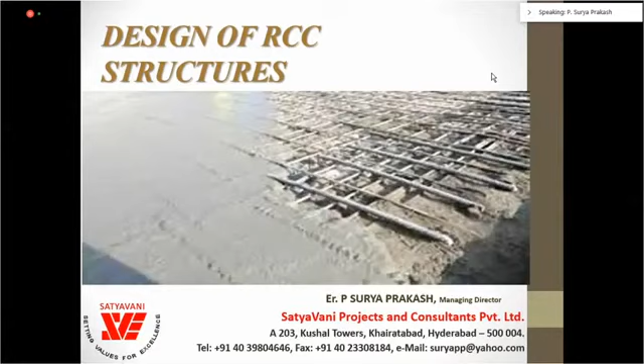So, design of RCC structures with practical aspects covered - this is the topic of today. My overview of the presentation is introduction to the topic and types of structural systems, and types of structural members. We will cover reinforcement concrete and analysis of RCC structures, and then design of RCC structures. So this is the flow of my presentation today.

Reinforced concrete is a combination of concrete and steel, and it is a marriage between tension and compression, that's what I can say. Concrete is flexible when it is made, and it gets strong in compression in 28 days. Steel is strong in tension but weak in compression due to buckling characteristics.

Concrete is the second most used material, and reinforced cement concrete is the most suited material for construction of buildings. Francois Coignet was the one who first adopted this concept of reinforced concrete. In 1853, the first reinforced concrete structure was built, a 4-storied house in Paris. Ernest L. Ransome was an innovator of reinforced concrete techniques at the end of the 19th century. So this is a brief history of concrete.

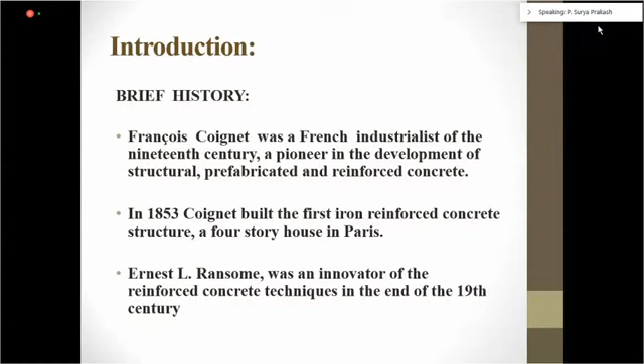Reinforced cement concrete is deployed in columns, beams, footings, and slabs, as we all know, mostly used. There are several other applications like storage structures, dams, water tanks, tunnels, bridges, walls, and towers.

In India itself, we have a 353-meter tall concrete tower, used for TV tower, and it withstood the earthquake in Gujarat post-earthquake. We also have shell roofs, folded plates, tall structures like chimneys and skyscrapers, Burj Khalifa, which is a standing example of fully reinforced concrete used in an 828-meter tall building.

We can make any shape with concrete because of this formation and the robustness in the structure due to rigid joints, and there is a lot of redundancy available in concrete structures, and flexibility in planning. We can look at columns, beams, slabs, any shape of slab we can do, with rigid joints and ease in design, as we'll see as we move forward.

The only difficulty is that detailing has to be very carefully done. It's an art actually, detailing, because we have to avoid reinforcement congestion. We have so many diameters of bars, and we have to tackle shrinkage in the design and the creep. Particularly creep will be a factor when we design high-rise buildings, so we have to do creep correction in construction, and then there's corrosion of reinforcement. Though reinforcement is embedded in concrete, we can't avoid corrosion if we don't deal with good concrete.

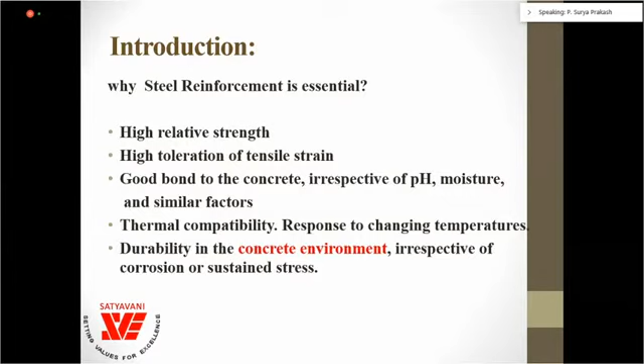So the merits of reinforced concrete include the bond between steel and concrete giving a stable structure, and less buckling risk in concrete structures because of the size of the concrete and the steel embedded in it, arresting the buckling characteristics of steel.

And we have aesthetics, like concrete structures can be aesthetically designed, and lesser corrosion.

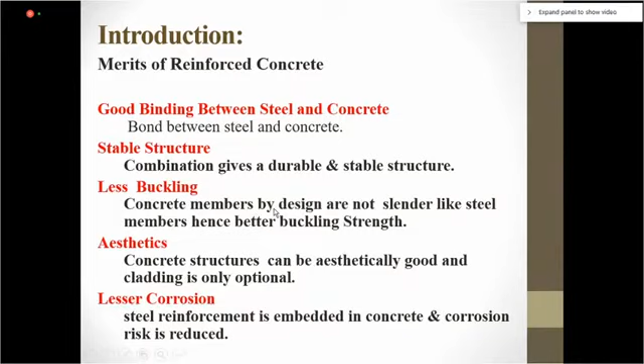Now we have to deal with vertical loads. Any structure, when designing, the first and foremost is dead weight, the self weight of the structure, and then superimposed dead loads like brick walls, floor finishes, partition walls, and so on. Then live loads, which are variable during the life of the structure. Vertical loads cause sagging resisted by beams and slabs, while lateral loads, primarily wind and earthquake, cause sway in the structure, resisted by the stiffness of the frame. This is the basic behavior of structures, which have elements like slabs, beams, columns, shear walls, and finally the foundation to transfer load to the ground.

We have performance-based design controlling deflections within acceptable limits for the service criteria of the structure, and we have partial safety factors in design to account for uncertainties in loading and material properties. Many people tell me, sir, concrete is assumed homogeneous, but it's not really homogeneous. To factor for that, we have partial safety factors defined in IS 456 for considering loads and applying the factor.

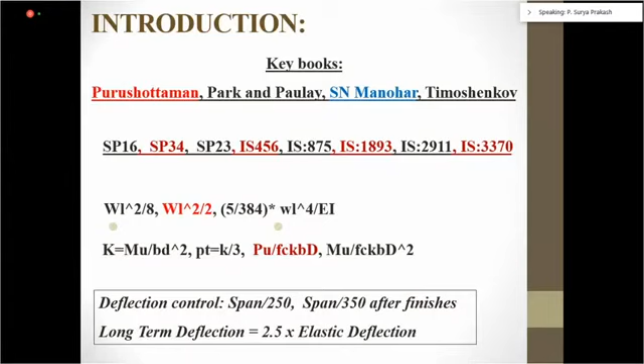The rest we can even go faster, no problem. So now the structural systems—the basic structural system we all deal with is a masonry wall and a slab. That is the simplest one, a ground floor building you can construct. But still you have to design the masonry bearing wall as per IS 2212 and IS 1905.

Masonry wall also—please never construct a brick wall without design. Let us not leave it to masons. That is very important. Recently I had an issue near Hyderabad where a brick wall collapsed from the 3rd floor due to wind of 40 kilometers per hour. So we have to be very careful in design, even for brick masonries. I can have a separate session for that.

Today I'll concentrate on the slabs. When we design slabs resting on walls, that's not a clamped edge actually—that is a simply supported edge and continuous edge at the most. So we have to design these slabs using the coefficients given in IS 456. We can design these slabs.

So this is a simple plan. When we get a drawing from a planner, we have to consider it and decide the position of the columns and beams so that it looks aesthetically good, because we cannot have protruding beams sticking out of the wall — that's not good to look at. Similarly, in corridors you don't want so many beams running. So we have to think of aesthetics when we design, and make the framing considering the plan given by the client.

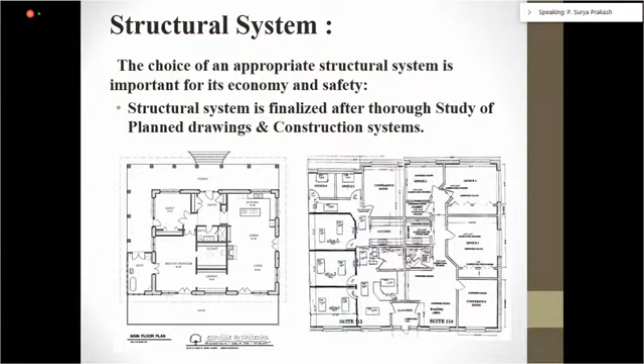The framing system selected should be suited to the building plan. The selection of the structural system is to be finalized with respect to cost, time, buildability, and functionality of the structure.

I have seen many structural engineers design the structure before even considering the construction methodology. That can lead to a lot of changes during construction, so we have to consider time as well.

Recently I got a call from a client. He asked, 'Sir, this is my plan — what will be the cost of construction and what will be the time taken?' I said, I can give you any time — you tell me in which time you want it and what budget you have. So this is what a structural engineer has to think about.

Considering the client's requirements, we have to decide the time available, and based on that and the buildability — meaning resources available, access to the site — there are so many factors we must consider while deciding the structural system: whether it's precast, tunnel form, slab and beam system, or monolithic rigid construction. There are many such systems even for residential buildings.

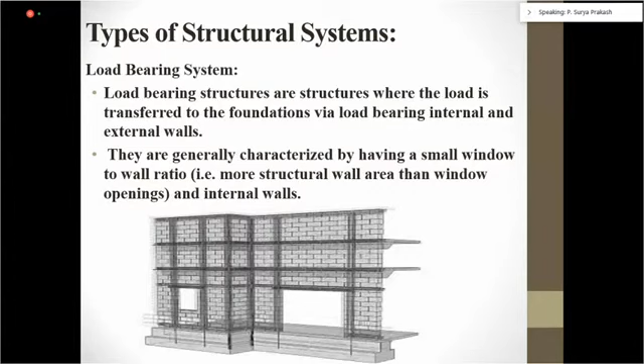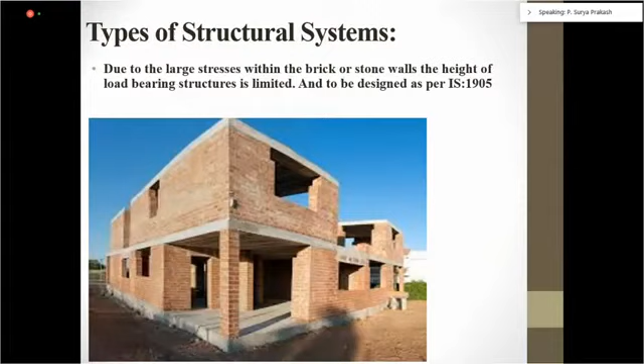In fact, post Gujarat earthquake, most government buildings performed very well because they were constructed using proper brick masonry and framing — all engineered, I would say — and 90% of the structures performed very well. So brick masonry is also good against earthquakes. In fact, post Latur earthquake, we constructed many houses with mullion and band construction, confining the brick wall, and it performed very well.

Next is the flat plate floor system. This is mostly adopted in the UK because the earthquake effect there is very low and wind forces are also very low, so they adopt this system for residential buildings.

There is no edge beam in this system. Labor costs are very high in the UK, so they don't even provide the edge beam — instead they increase the slab thickness.

I have designed a slab thickness of 9 inches for a residential building, with a floor height of 9 feet. Because there are no beams, you can construct the walls flexibly. So this is another system, simple, where earthquake or wind does not govern the design — you can use this kind of system.

The advantages are simple construction and a flat, low ceiling — you don't need a false ceiling, and you can embed light fixtures and plumbing fixtures in the slab at convenient positions. You can go up to spans of 15 to 30 feet, that is 4.5 to 9 meters. For live loads above 100 psi, you can go for 4.5 to 7.5 meters for higher loads.

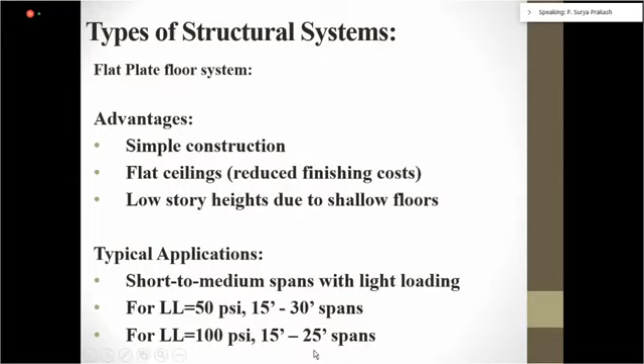Next is the flat plate with spandrel beam, that is, an edge beam. This reduces the thickness to some extent because you don't have to check for punching shear on three sides. When you have the beam, you don't have to worry much about punching shear, but you do have to check for one-way shear.

So you have increased gravity and lateral load resistance with the edge beams, increased torsional resistance, decreased slab edge displacement, and decreased slab thickness. These are the advantages. But the shuttering for edge beam will cause a little delay.

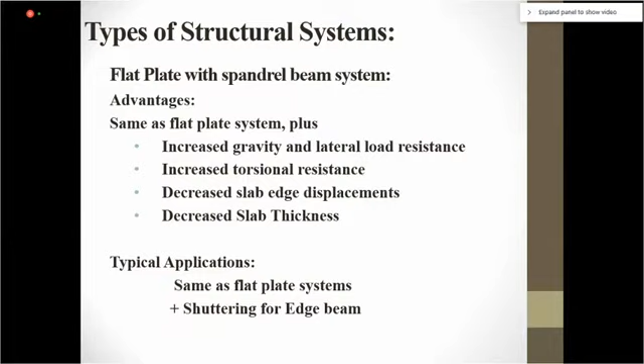Next is our conventional column, beam, and slab system, two-way bending. Here you can see the yield lines drawn for the same system, diagonal, square panel. So in this also we can optimize.

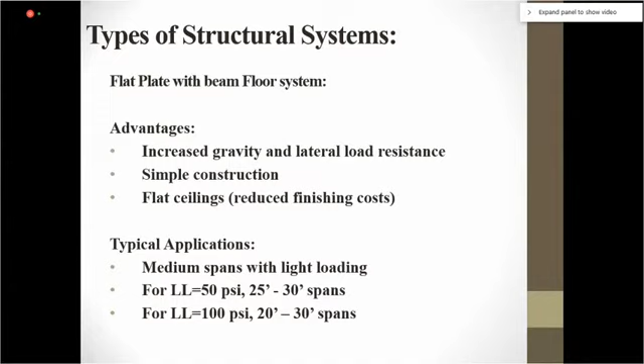I had BTech students do a project to identify the optimum span for a G+5 or G+3 structure. We found 3.6 meter is the optimum span - if you draw the curve, you get the optimum cost at 3.6 meter span. So it will be a very good system if you go with around 12 feet span, or 10 feet, 12 feet, 14 feet like that. That is a better structural system.

Next is the flat slab. We talked about the flat plate, and now we are talking about flat slab. In flat slab, you introduce drop panels. With these drop panels, the flat slab system can go up to 13, 14 meter span also. This is normally used for office or commercial buildings, because for office buildings it's advantageous to have larger span.

And for commercial buildings like mall and multiplex, 8 meters is an optimum span. So these are all the different optimum spans I'm giving, considering the overall planning, based on my experience.

Normally if any client comes to me to design an office, I'll go with 11 meter span flat slab. And in flat slab you can also have column heads to reduce the drop panel thickness. Otherwise, normally for 11 by 13 meter span, you will get a 475 drop in the flat slab, and the slab thickness will be about 200 to 225.

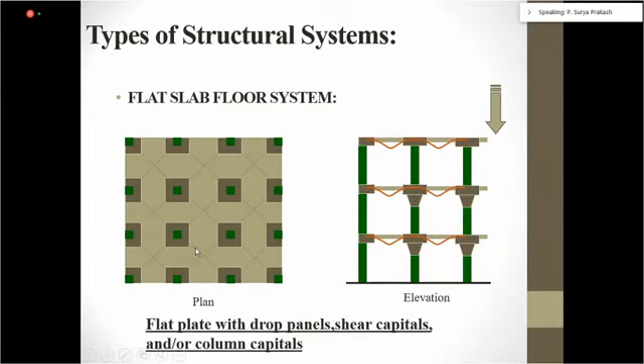You can also go for post tensioning, though I will not discuss post tensioning in this session. Flat slab gives reduced slab displacement because of the drop panel - one third of the span you can have a drop panel - and increased slab shear resistance, relatively flat ceilings, and lateral load resistance also improves a lot with this drop panel. And low story height, because the floor thickness is less and services don't require additional space, unlike with beam obstruction where pipes have to go below the beam.

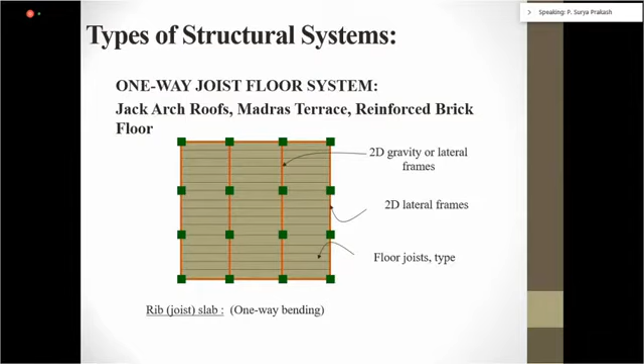Next is the one-way joist floor system. This is our traditional Indian system - Madras terrace or jack arch roofs. If you go and see old buildings, beyond 60 or 70 years old, you will see lime concrete with jack arch roof, or Madras terrace with wooden rafters and wooden joists. This is also one of the structural systems, but I will not discuss it today.

But nowadays we have this one-way joist composite system, where there is a technology called speed floor, promoted by Jindal, where you have light gauge steel cold-formed joists embedded into the concrete, behaving as compression concrete and tension joist. Very efficient, and it can also be used.

So we have these one-way joist floors. We can go for a longer span of 9 meters with a slab thickness of 120 to 150. That is the advantage in composite floors.

And we have the two-way joist floor system, that is a grid floor kind of thing, or waffle - we call it waffle when the spacing of the joist is very less - or ribbed floor. You must have seen in IS 456, ribbed floor is given.

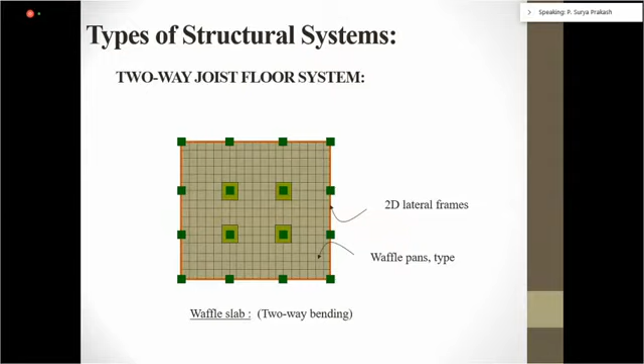Next is the two-way joist floor system - for longer spans with heavy loads. I designed this two-way grid floor in Hyderabad with a 25 meter by 25 meter span, with a 750 depth beam, in which we could even provide ducts for air conditioning within the 750 depth beam. So that is the advantage in this two-way system.

But you have to design for the torsion. When we consider the grid, two beams crossing at a rigid joint, you have to design for the torsion - combined torsion and bending.

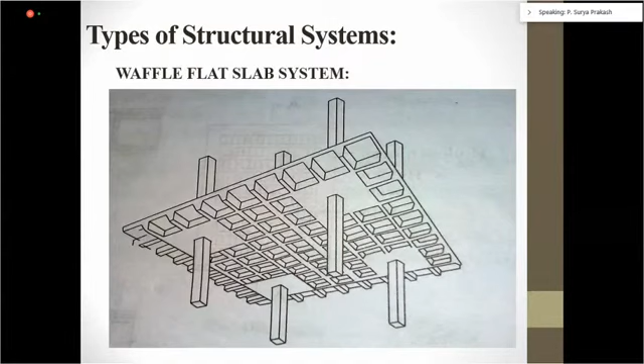So these are the waffle slab systems. Waffles, because they make a form - you can even use plastic troughs and pour the concrete into them; that is the waffle slab. And this is the ribbed floor I was talking about, and solid beams - this is one-way slab and two-way slab with solid beams, and waffle with beams, ribbed with integral beams, and waffle with integral beams.

So these are all the simple structural systems we come across in buildings, and they're all necessary - we have to use one of these systems depending on the span, loading, constructability, and availability of skill and formwork.

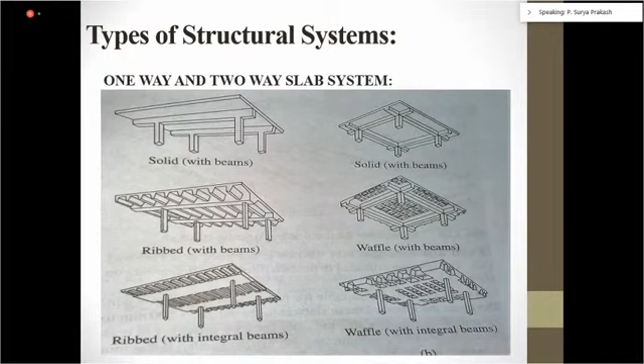So now we'll slowly go into the actual topic.

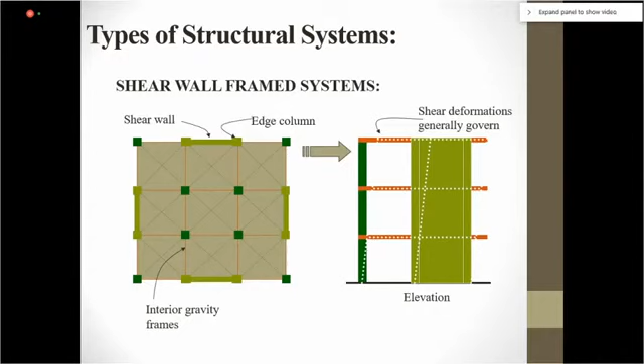This is also quite possible. The flat slab will act as a diaphragm, transferring the shear to the shear wall, and we can design this kind of structural system also. But shear wall requirement will be essential when we go for 10 floors and above. Beyond 30 floors, we have to design with a tube frame. I'll just show you this for creating interest in tall buildings.

So this is a core-supported outrigger system. This is Taipei Tower, you can see. And this is a frame tube system, which you can see in Chicago, Sears Towers, and brace tube systems. We have this in Chicago again, and this is a brace tube system.

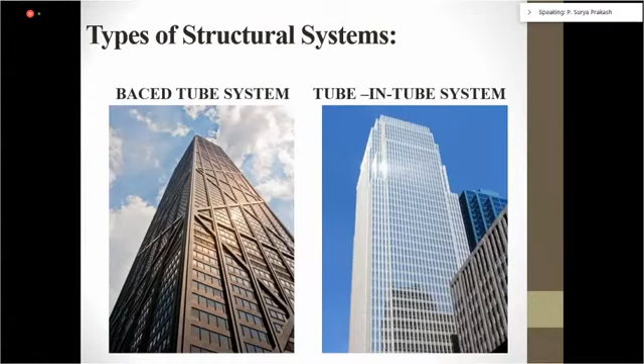So we resist the lateral loads with the outer frame and this bracing, and vertical loads are designed with the inner columns and beams. The same thing happens in cooling towers also. You have seen hyperbolic paraboloid shells - the whole shell is designed to resist the wind loads, and inside you have the frame, columns and beams in the cooling tower. They're designed for vertical load.

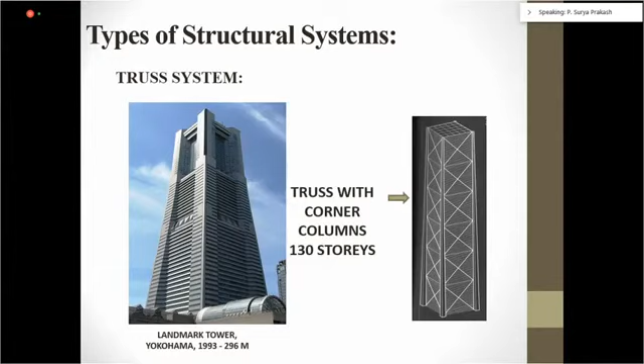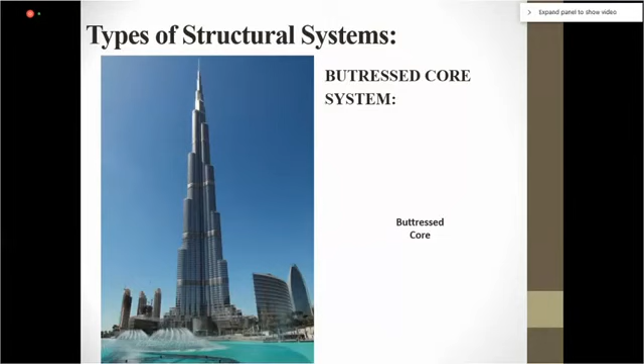And diagrid system, mostly talked about in Amaravati in Andhra Pradesh, but of course it didn't take off well. This is a buttressed core system designed by famous Bill Baker - it's 828 meters tall with a hexagonal core and I-sectional buttressing, because I-sections are very good in flexural resistance. And we have the space truss Bank of China, and we have the super frame. Of course, this is not there now - World Trade Center has been destroyed.

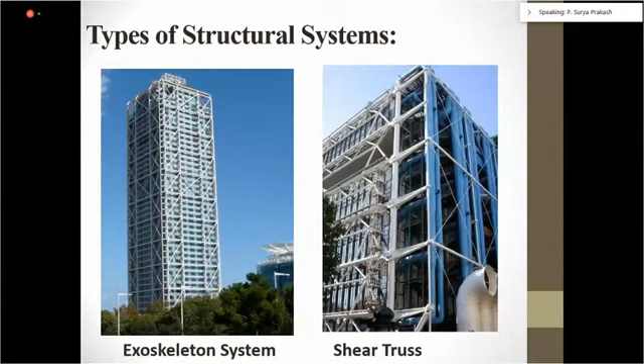And we have the exoskeleton system. These are all beautiful truss systems if we understand these trusses. So this is a truss in a high-rise building. Because truss is used for cantilever systems, you can design towers and these buildings also. So next, we have just seen the high-rise buildings because we have to understand the load transfer mechanism - lateral loads and vertical loads separately. Shown some interesting examples worldwide in skyscrapers and super tall buildings.

Now let us come to our own bread and butter, that is multi-storied buildings - stilt plus 5, cellar, stilt plus 7, that kind of structure, in which we have these routine elements of beams, columns, slabs, footings, and staircases. So today we'll focus on this - how the behavior of a beam works, what are all the things in a beam?

Basically, we design for shear and bending, and sometimes torsion. When we have torsion, we have to calculate the equivalent bending and equivalent shear and add it. Unfortunately, our IS 456 is still not rationalized for design against torsion, so it will be very conservative design if we design for torsion. That is why we have a clause in the code - you can ignore the compatible torsion. That means if the structure won't fail, like we have a cross beam and a main beam, and the cross beam has two supports, without considering the end moment is okay.

So you can end-release this cross beam in your STAAD analysis and take only shear, so that you don't have to design the main beam for torsion. Because if you design the main beam for torsion, it will be very uneconomical - your steel quantity will be very high. So design mainly for moment and shear.

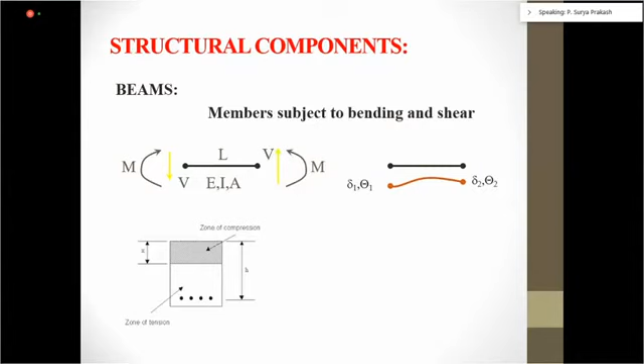And the deflection check, of course. We have these types of beams: cantilever, single support, simply supported beam, overhanging beam, continuous beams with roller and hinge, fixed beams with both ends fixed, and cantilever with the prop. So these are the types of beams we have.

Simply supported beam mostly comes on a brick wall, treated as a simply supported beam. Many people ask me how to model the bearing. In bridges, we use neoprene bearing to allow lateral movement of the beam. In brick walls, you can also put polythene sheets for allowing relative movement of the beam.

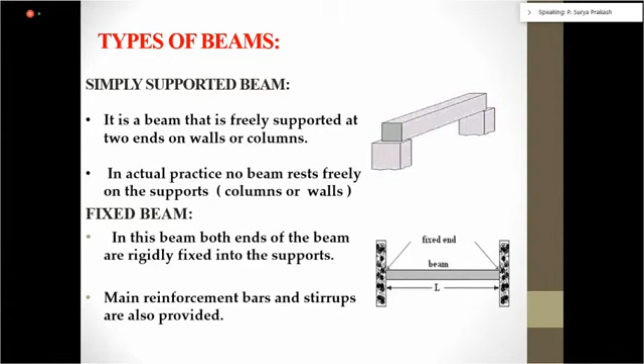And this is the fixed end beam. And we have a continuous beam like this. We can design the continuous beams.

As far as simple beams resting on the wall, IS 456 has given the moment coefficients for the beams - end support, penultimate support, end support, and intermediate support. Like that, we have the moment coefficients for live load and dead load.

You can also redistribute these moments in reinforced concrete. Up to 15% end moment you can release and add it to the span moment. It's economy, and also because we are allowing cracking, and realistically in the long term it can happen. So better to redistribute the support moments and design so that you economize.

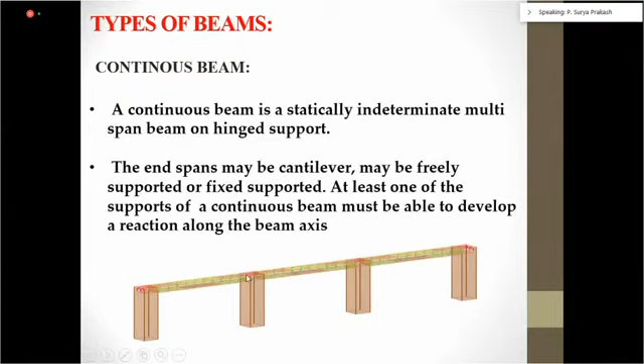Otherwise, you know what is the span moment here? It is WL square by 24. If you consider it as continuous, it is WL square by 10. You will have very heavy reinforcement here. Whenever you have heavy reinforcement due to congestion, performance will be difficult. So release some per 456 - that's my main idea of showing this code.

And now requirements governing the detailing and all we have to take care of. Next is the analysis of structures.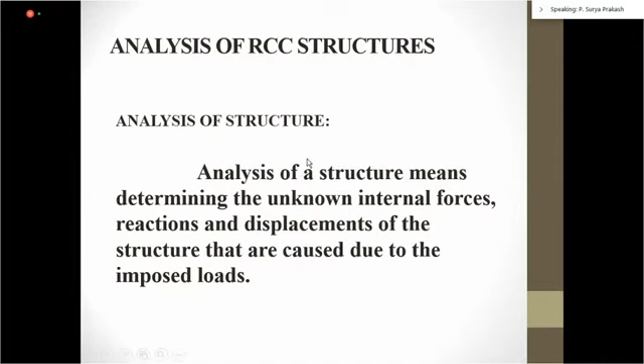Internal forces acting on typical structural members. Reinforcement will take care of the tension, and beam primarily is to transfer shear and bending. And the column, we have discussed, has axial forces - this is how axial force, 2 shear forces, and 2 bending moments. In a 3-dimensional component, this is how the forces will be.

So this is always - you should use the right hand. So you have the moment about both the axis and axial load, shear in this direction and shear in this direction.

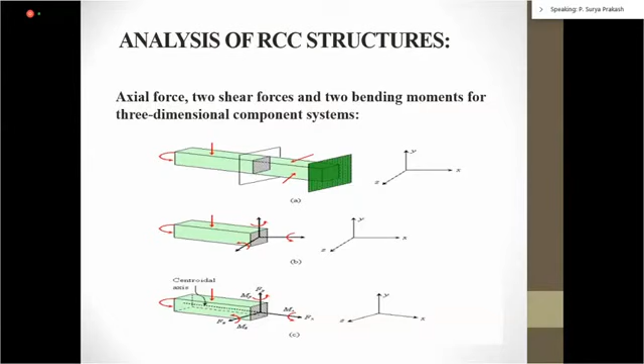So statically indeterminate structures - we have the force method, 3 moment equations, slope deflection method. Let's not forget these very important methods apart from STAAD and all. I'm doing one project with students now - they have done this much volume analyzing the whole structure using moment distribution, slope deflection, Kani's method, portal method, factor method, and cantilever method. All these methods are very important.

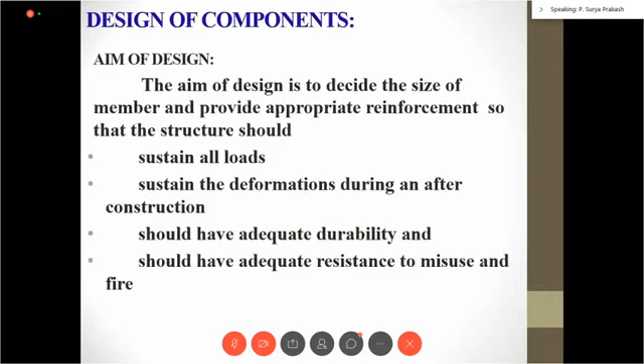Please use this at least once for one project and compare with STAAD results. Every engineer must do this analysis we talk about. And the aim of designing is to arrive at the steel required and the size of the member that is required.

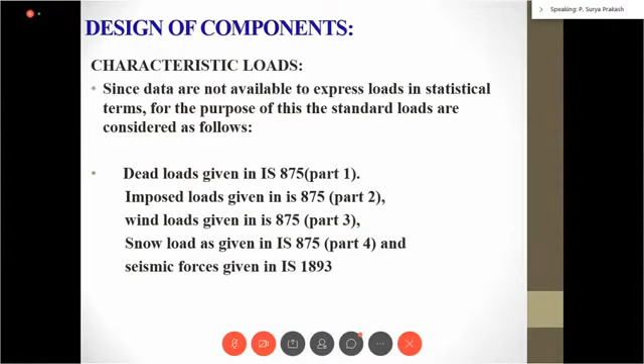For estimation of the loads, I explained IS 875 and IS 1893, very important. And then limit state method and working stress method, load factor method or ultimate load method. So these are all the methods of design.

Limit state of collapse, limit state of serviceability, limit state of durability - these are all the different limit states we have to consider in the design. I had recently one case argument in court - recently means about 10 years ago - about whether this structure is safe or not safe. How do you decide whether a particular structure is safe? So we have to understand this limit state of collapse, limit state of serviceability.

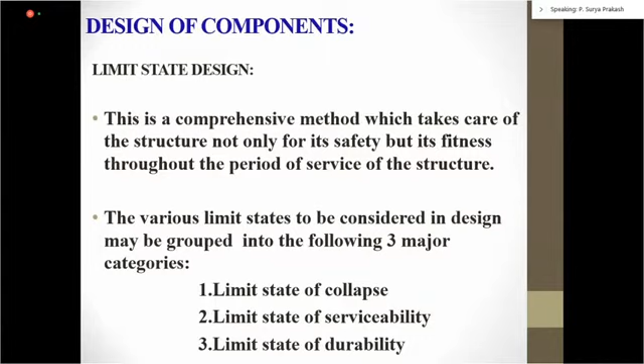Normally we design for limit state of serviceability, but we can also design for limit state of collapse - that is called robustness analysis. That means identify the most critical element in the structure, and if that element fails, still the structure has to be stable. That is the limit state of collapse.

So it deals with the strength and stability of the structure primarily, whereas serviceability deals with cracking also - that means performance of plumbing lines, performance of sewer lines, and water dampness resistance and all. That is the serviceability.

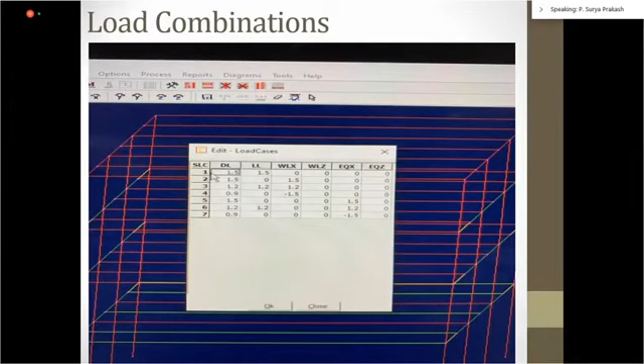So load combinations - we need to remember there will be 13 load combinations, dead load plus live load. Apart from that, 12 load combinations of earthquake in both directions, wind in both directions. This is minimum we have to do for analysis of the structure's load combination.

Next is the quantities of steel and concrete. Normally, what will be the steel consumption in a normal residential building? It can vary anything between 2.4 to 3.5 for residential buildings. So we have to remember that. What will be the steel in beams?

Steel in slabs is normally 0.65 kg per square feet of the building area. Steel in beams is about 0.8. Steel in columns is 1 kg, and steel in footings is 0.3. And other elements like staircase, lintels, and such.

We have to remember these quantities and design the structure such that they won't exceed beyond this. Deflection checks we have to do for lateral sway and vertical deflection of slabs and beams. 20 mm is the maximum deflection with the long-term effect considered, and with the factor of 2.5, approximately 8 mm is the elastic deflection you should control.

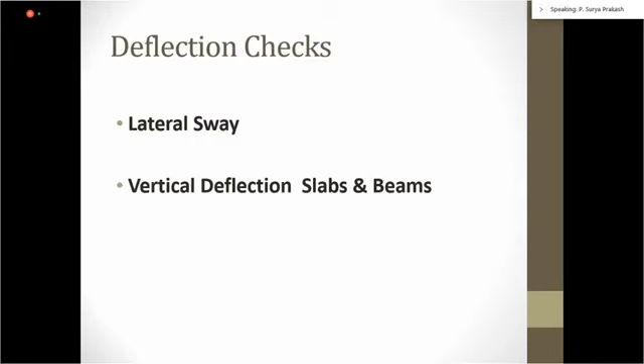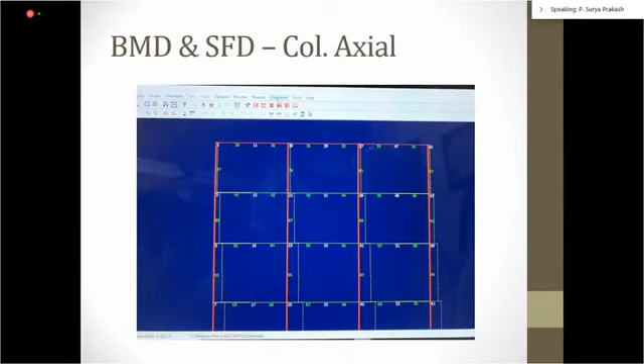Any analysis you do, if your deflection is more than 8 mm, revise your design, revise the size, or revise the frame. So you have to draw the force diagrams like this, axial force diagrams. You must see for every frame how it is behaving after the analysis, and the moments in the columns.

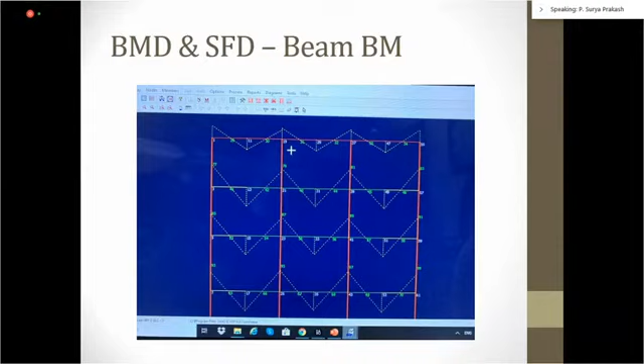I'm sorry, today only I quickly took some pictures of my software analysis and posted them. This is the shear force diagram in the beams, and this is the bending moment diagram. Of course it is curved, but this software shows only end moment and span moment, so it shows linear in between. We have to understand this bending moment and shear force, and study whether the structure is behaving as we have planned, as we have modeled.

That's very important before going for the design. So the design guidelines, we have deep beams and shallow beams.

And the calculation of moment and redistribution of support moment, this I explained. And we have this bending moment and shear force diagrams for the beams.

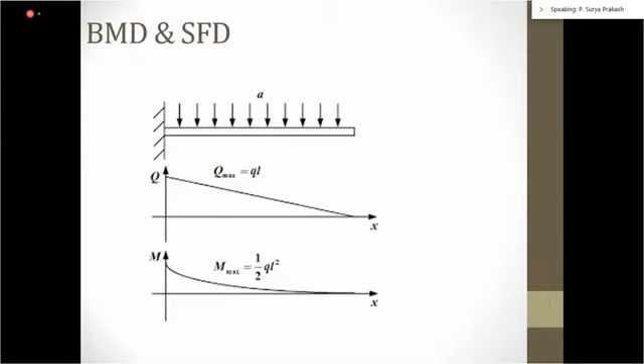Particularly you must verify this. I'm showing it because I interview so many students when they come for a job. The first question I ask them is to draw a bending moment diagram, and I am disappointed many people can't do it.

I'll only ask a few questions: What is characteristic compressive strength? And what is the bending moment shape for a particular shape of beam? That's why I'm showing this, it's very important for us to draw. We should be able to draw it - we may not get the actual value, but we should know the shape of the bending moment.

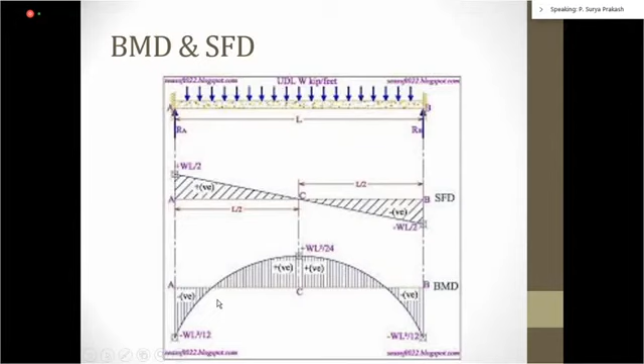This is very important for termination of the top reinforcement, and also for termination we have to provide minimum lap length beyond the point of contraflexure. So we cannot terminate the reinforcement at the zero moment. This mistake many people do in the footings also.

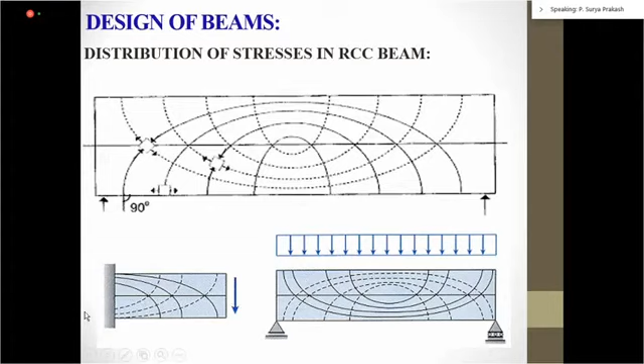So it's very important to understand the stress contour and the bending and shear stress pattern in the beams. And this is the stress diagram for limit state.

The main difference between limit state and working stress is: in working stress, we take the linear variation of the stress and model it with a triangular shape, whereas in limit state we take the parabolic variation of the stress, particularly in compression.

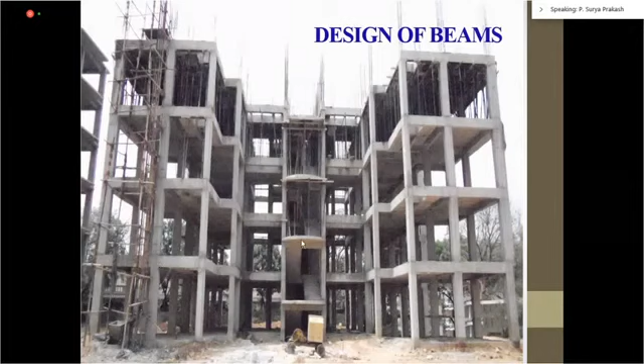So this is the multi-story typical building where we have the beams, so many shapes of beams, curved and rectangular beams. And this is from SP34.

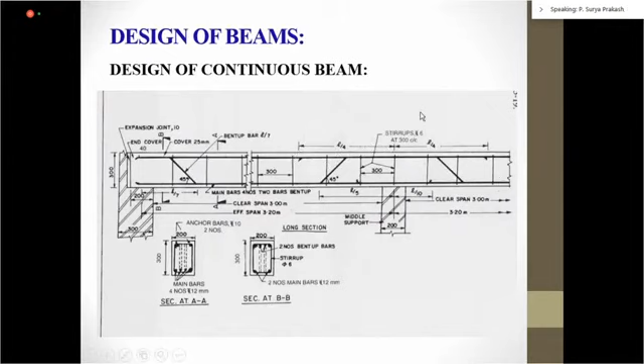And top reinforcement in case of end moments. So these are the typical types of continuous beams. Here you have the extra reinforcement, and the termination of the extra reinforcement normally as per code should go up to L/4. For cantilever beams, portico beams, tapered beams, we make it look thinner at the end. And flanged beams - this is a T-beam I was talking about, and an L-beam.

Now, the design guidelines for columns. In India, the optimum percentage of steel in columns is 2% because steel is costlier, but as per code it is 4% maximum. Now code allows even in India, but in Singapore they go up to 6% because of the value of space, so they can go up to 6%. But you need to use proper concreting methods, and even IS code now permits going up to 6% if you are not using the standard lap reinforcement.

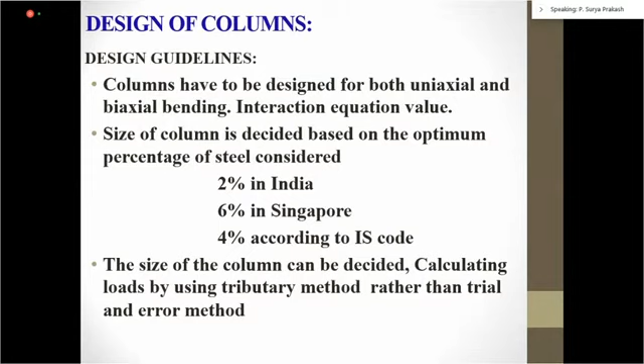So this is the reinforcement and design guidelines. As I said, the L and T shape we can provide. The main important thing I come across at many sites is that people don't provide the stirrups before concreting the below portion. This is very important - also cross connecting these columns before.

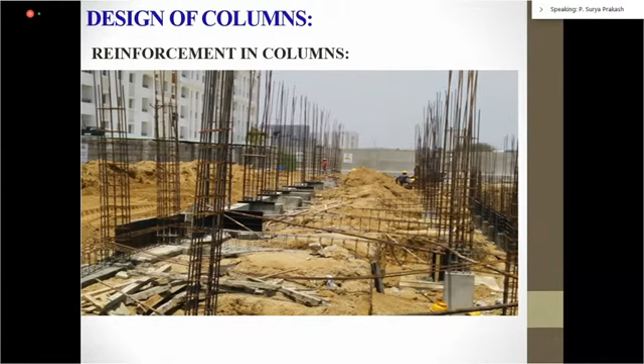Otherwise, people leave it like this - now that the corona lockdown has come, people leave the reinforcement exposed, and it will warp and lose its strength. So we have to tie it across always. You can see the bend here - you have to support these columns with cross supports or struts.

And the column construction and curing - this is very important. I always say, please tie the cube to the column only, so that the cube represents the curing of the column. And similarly, put the cubes on the slab.

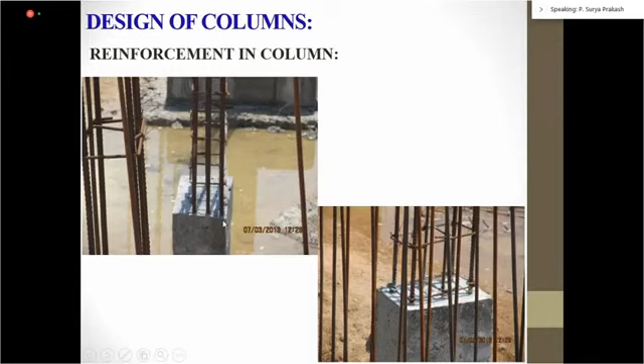So this is the reinforcement in columns - cover to reinforcement. You can see here it is more cover and here it is less cover, so that should be avoided. You must use cover blocks and marking properly. Here also, I always use bad photos to remind me that this can happen as a designer, and design properly. Here you can see couplers used without laps - we have done that. And reinforcement detailing for the columns also we have to consider.

Then for slabs, the deflection check L by delta should be less than or equal to 250 for dead loads and construction loads, and L by delta should be less than 350 for finishes, floor finishes, and partition.

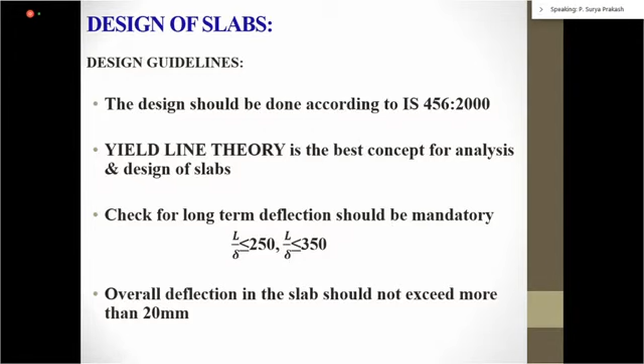So these are important guidelines, and this is the slab reinforcement before concreting, and this is the beam and slab - how you concrete and represent it is very important. The design of slabs should be done as per the coefficients given in IS 456. Otherwise, refer to Timoshenko for coefficients for different types of loading on slabs: concentrated load, line load, triangular load, uniformly distributed load - all types of loads, we have coefficients for different edge conditions.

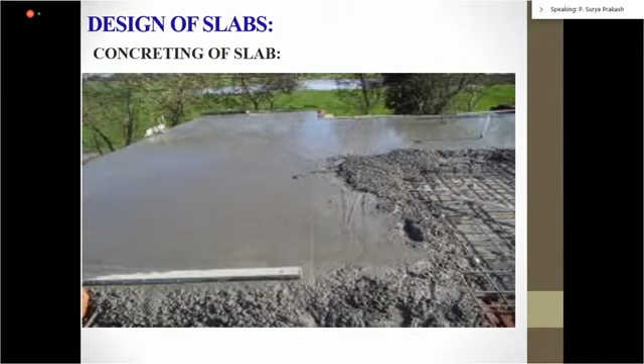So these are all the slab reinforcements and beams. Concreting sequence is also very important - we have to think of the concreting method also when designing, because we have to give the construction joint and the pour sequence of the slabs. We should ask for the method check.

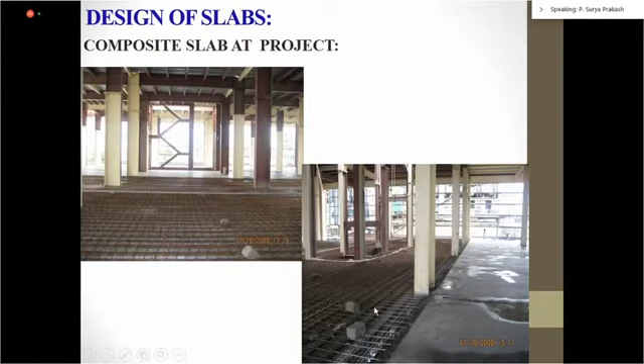Nowadays we have welded mesh reinforcement also for slabs and walls, so we can use that. And composite slabs with deck sheet also we are using, pouring concrete on it. This is mostly occurring nowadays for faster construction, reducing the cost of formwork, and arriving at quality and speed. So we should also design slabs as composite slabs, where we take the composite action of the beam and concrete - beam in tension and concrete in compression - and in the slab, deck sheet in tension and concrete in compression. That is our composite action.

So this is the one-way slab typical reinforcement. But I suggest whenever you put the slab on the terrace, provide temperature reinforcement on top. Otherwise insist on insulation of the concrete above, which is costlier than providing 0.12% steel in both directions in the top terrace slabs - very important.

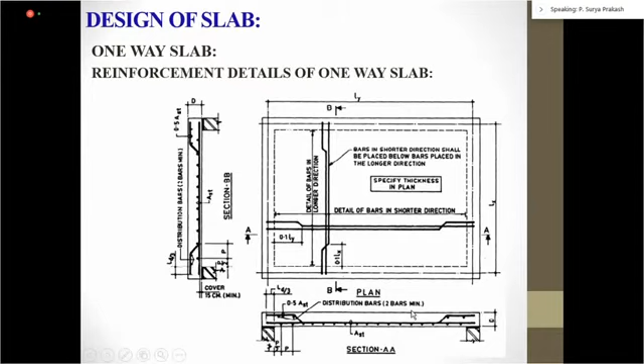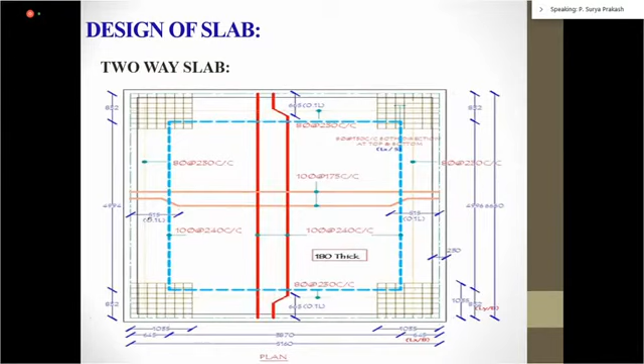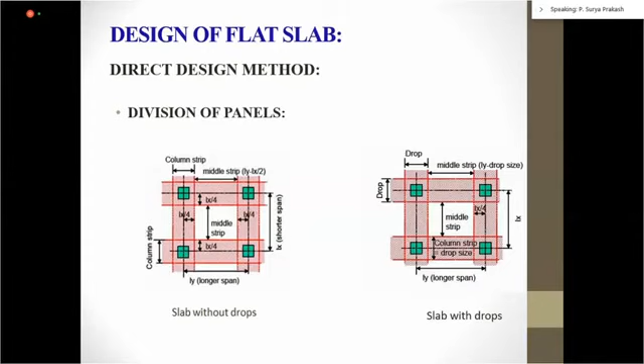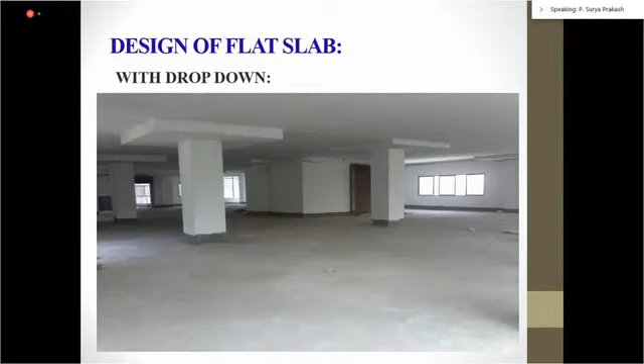So this is the column capital with the flat slab. This is one of the photographs we did about 25 years back. And this is a drop panel in flat slabs. This is how it looks. And this is the drop panel. And this is a big column capital cum drop panel, you can see. And this is a combination of drop panel and column head.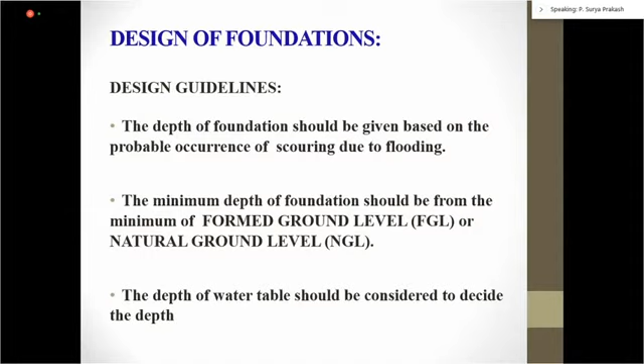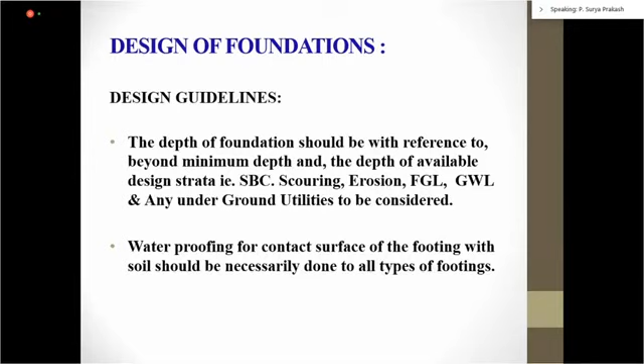And design guidelines for foundations next. So the most occurring mistake is definition of minimum depth of foundation in foundation design. So we have to consider the water table, we have to consider the scouring or erosion, soil erosion, and fix the minimum depth of the foundation. And recently somebody asked me, sir, we are designing some 20-story building, what should be the minimum depth of foundation? So this kind of things, you have to consider the soil strata. You have to give the stability to the structure. Sometimes passive resistance also is important in the behavior of the structure.

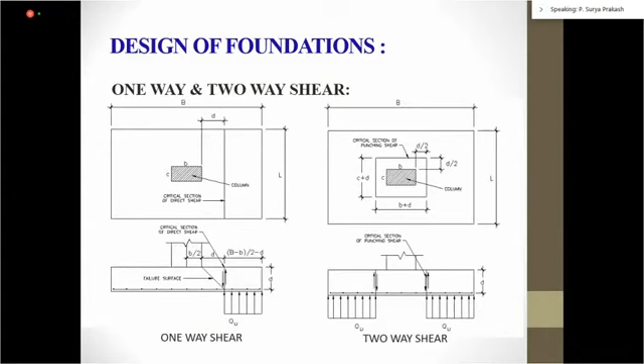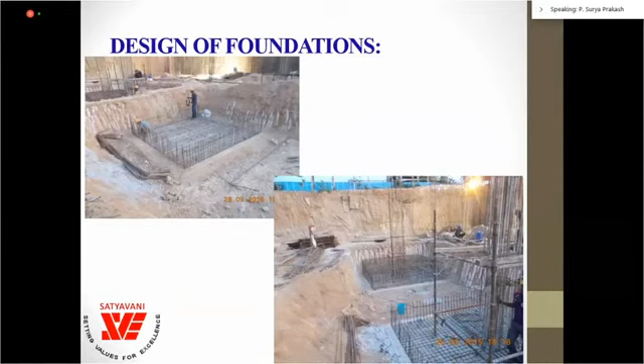And these are the photographs of the foundations. This is a pad type footing, and we have this edge reinforcement. This is what I want to stress upon. I have seen recently some foundation without this bend, only straight bar they have put. That is wrong. You must give a bend as per code. You cannot leave the reinforcement at the zero moment. And we have a cover of 50 mm, so there is a moment definitely. And so you should have an L bend compulsorily, minimum lap length, L bend.

And in design of isolated footings, no shear reinforcement is to be provided. Better to avoid. Never design shear reinforcement in the foundation because we can't see what is happening to the behavior of the concrete below the earth. So better give the concrete. Concrete is good in resisting shear. And design for flexure should be done, and the shear reinforcement shall be provided after one-way shear check, but it's advised to avoid shear reinforcement.

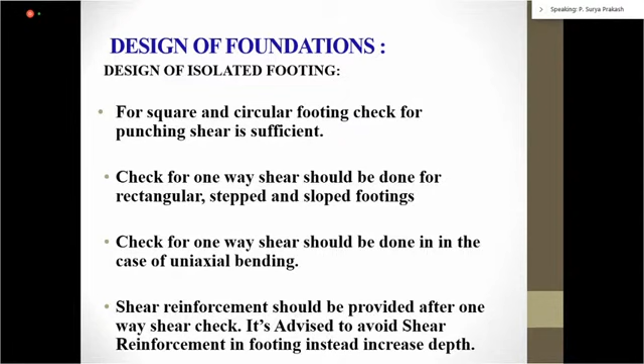So in case of uniaxial bending, normally for biaxial bending you have to check for two-way shear, or if there is no bending, primarily axial, you also have to do two-way shear. But if you have a uniaxial bending primarily, then you must do the one-way shear check.

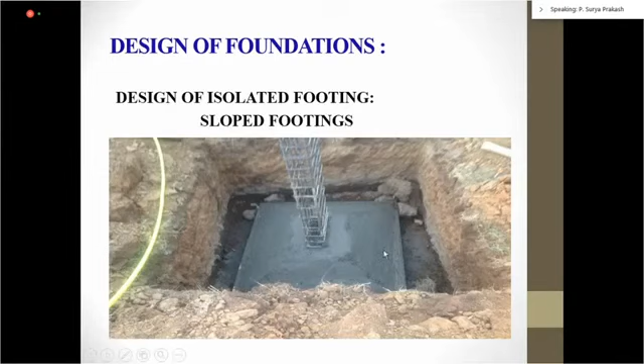There will be a lot of shrinkage in the concrete because you're increasing the concrete volume. So prefer step footing or pad footing. In case you are going for slope footing, insist on the top shuttering.

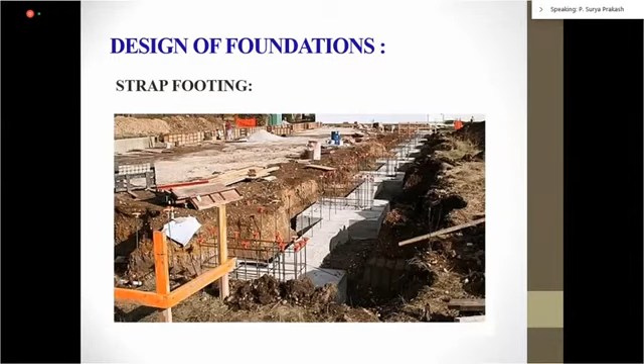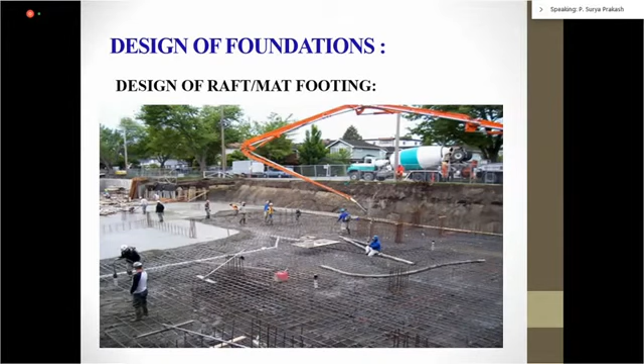19 load combinations, you have to consider the varying loads, checkered board pattern as per the code. This is a slab beam and mat footings. This is a raft foundation. So you can also design it as an inverted flat slab in the raft foundation. And concreting of raft is also something we have to plan very carefully, very important.

It's also part of the structure, plinth beam or grade beam. Grade beam we provide at the ground level or grade level, and plinth beam we provide at the plinth level. If your foundation depth is very small, you can go for plinth beam. If foundation depth is more, go for grade beam.

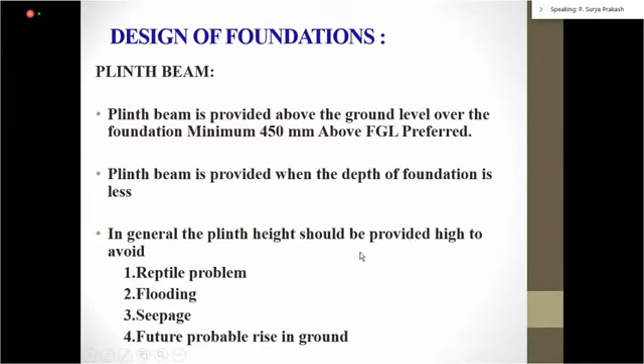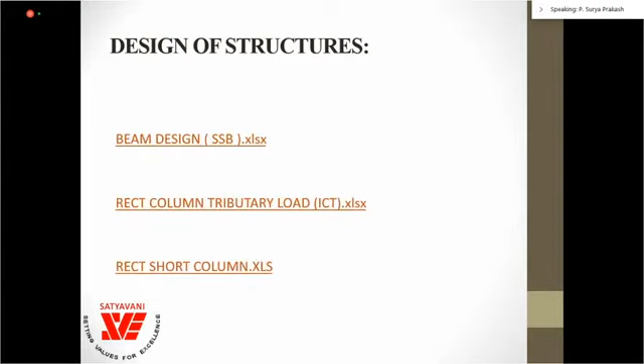So now I'll take the questions.

Any questions, Deepak? If you have filtered them, you can read it out.

With your expertise and experienced sharing, our civil engineering students will definitely gain more confidence in their design. So we request you to continue even after post-COVID, because at SCBIT we want to make this a norm - every 15 days or a month we want to hold a webinar, so we can get more responses and come in contact with more engineers, students, and stalwarts to gain more knowledge. This is our idea, sir. So please give your time in future too.